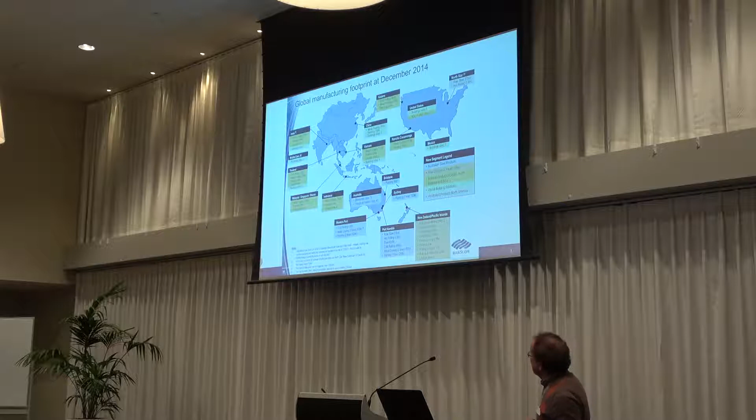My name is Habib Zughbi. I am from a group called Coke and Iron Making Technology in Bluescope. We're based in Port Kembla, and the group is about 10 to 15 people. We've got a long history of mathematical modeling, CFD, DEM, flow sheeting, other more mechanistic models, mass and energy balances, and so on.

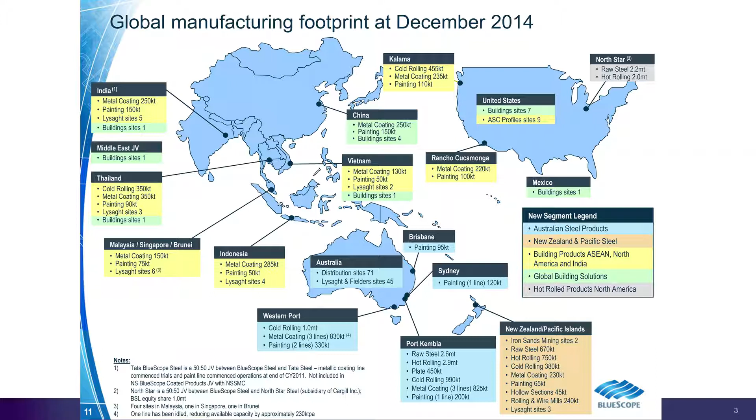Bluescope is basically a global building solutions company. We've got a footprint in about 19 countries. We are based here in Port Kembla, which is an integrated steelworks. We've got, at the moment, one blast furnace operating, plus a coke oven, sinter plant, blast furnace, BOS basic oxygen steel making, casters, and painting and coating lines. We produced about 3.1 million tons last financial year, probably a little bit more this year. Our products are mainly flat products, fencing and roofing products, and as I said, we've got a footprint in many other countries around the world.

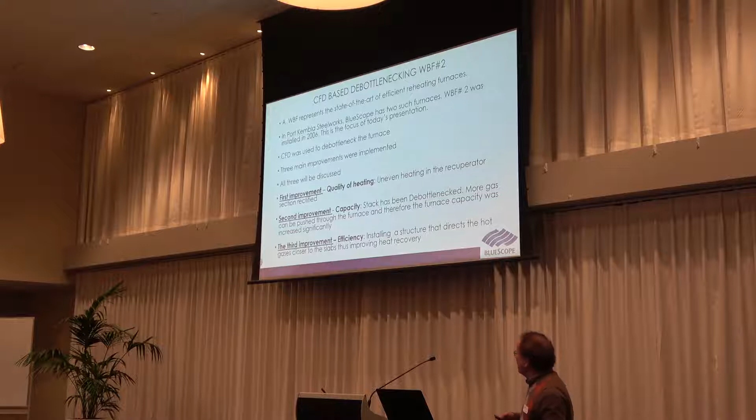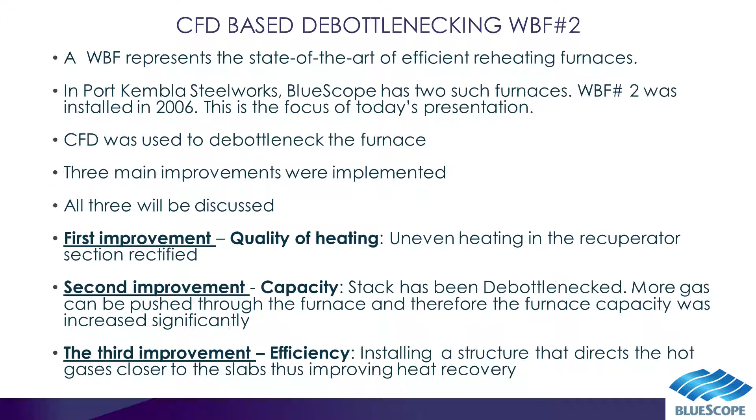The first issue is the quality of heating in the recuperator section—there was uneven heating, and we fixed that. The second, and maybe the major one, was improving the capacity, which was really focused around debottlenecking of the stack. The stack has an induction fan and a venturi, and just by a simple adjustment we were successful in increasing the capacity significantly, to the tune of almost 25 tons an hour. The third improvement was better efficiency of heat recovery. We'll talk very briefly about each of these three.

The walking beam furnace is pretty long, about 50 meters long. The furnace proper is here, where you have two opposite sets of burners from either side, and the slabs travel counter-current to that—gas flows one way and the slabs go the other way. After the furnace proper, these hot gases keep flowing, heating the slabs.

The gases then go through a very convoluted path—they make a 90-degree bend, go up, make another 90-degree bend until they get there, and then drop into the recuperator section. So it's a pretty convoluted, pretty big geometry.

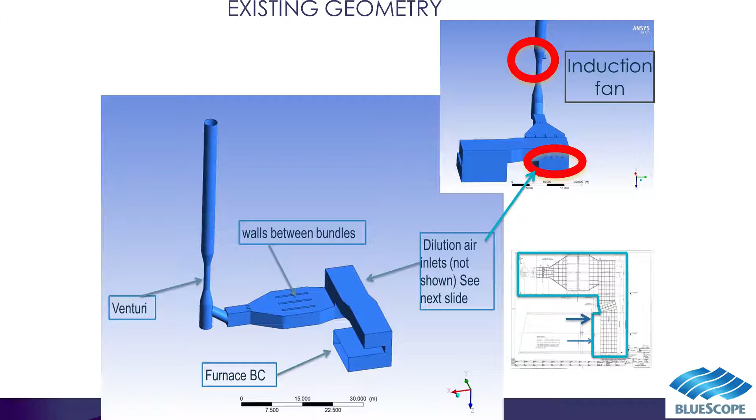The cold air is injected right at this point, as shown here. The hot gases come in to control the temperature, and we inject a fair amount of cold air in there.

In the recuperator section you've got about 12 bundles of vertical tubes that recover some of the waste heat. What was noticed was really uneven heating—the difference was something like 100 to 150 degrees across the width of the recuperator. The hot gases from the furnace were well mixed; the issue was how well the cold air was mixing with the hot gases.

So we started looking at where best to inject the gases. We moved the injection point from here to here. You can't really see it from this view, but it's a very swirly type of flow. By injecting the air right there before it drops into the recuperator, it did not have the time or the space to mix.

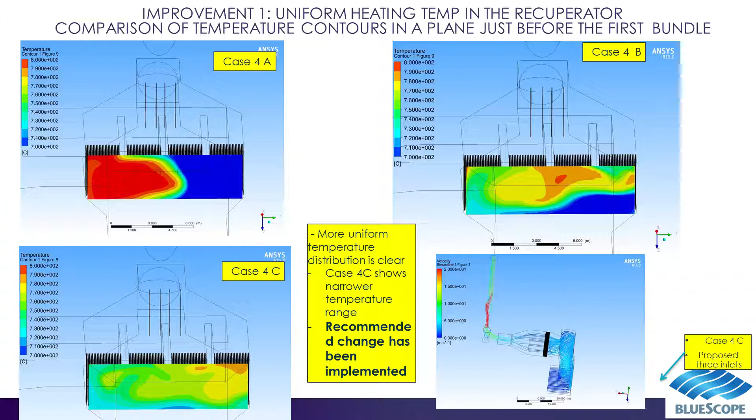So it was coming in and then staying on one side, resulting in this temperature profile. Just by moving them to here, where it's got a lot more time and space to really mix in, we moved from this profile to about this profile, resulting in a much reduced non-uniformity in the heating in the recuperator. The change was implemented, and the results were achieved as shown.

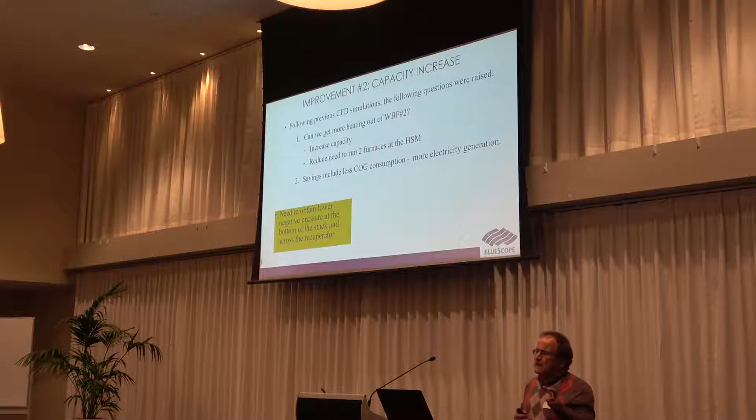The second one is how can we improve the capacity. We have two furnaces, and the gas balance in an integrated steelworks is always a challenge because we've got indigenous fuels - blast furnace gas and coke oven gas used as fuels. If we have good balance, we can save millions of dollars on natural gas purchase. Sometimes we have to run the two furnaces, and that really stuffs up the balance of the gaseous fuels across the plant.

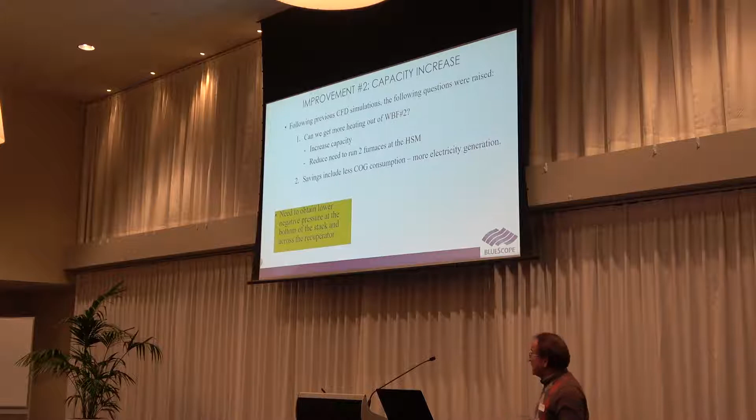So we were trying to improve the capacity so we can run one furnace rather than two. The engineers came to us, as you've seen that venturi in the stack, and asked what can we do to really improve the capacity. Their focus was, can we obtain a more negative pressure at the bottom of the stack so we can push more gas in and heat more slabs.

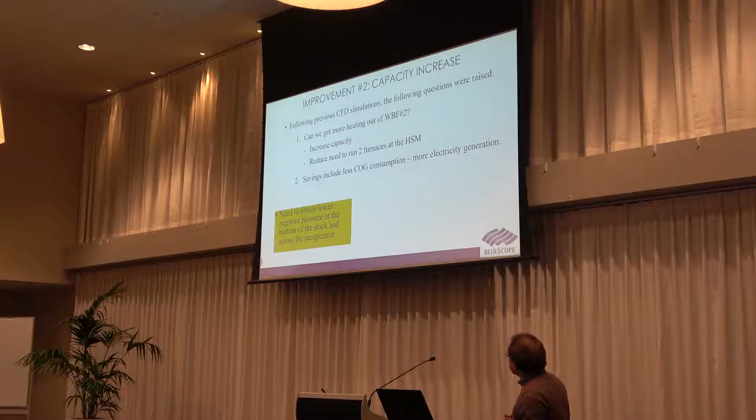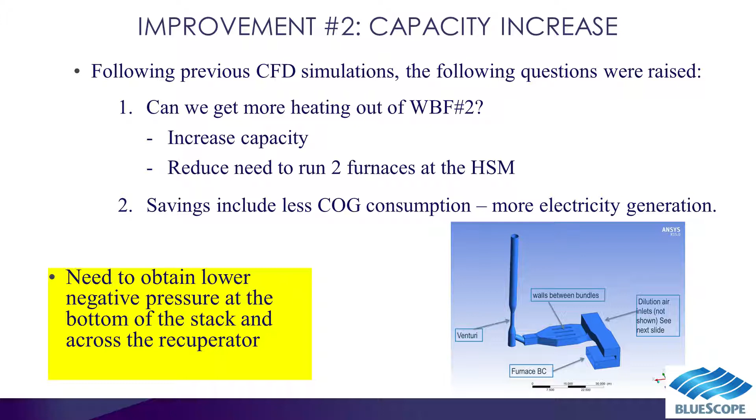So this is the stack, there's the venturi, there's the gas from the recuperator, and the nozzle from the induction fan comes in here, opposite to it. There are maybe 5 factors that control the performance of the venturi: the throat, the straight section between the converging and diverging section, its length and diameter, the gas flow rate, and the position of the nozzle itself.

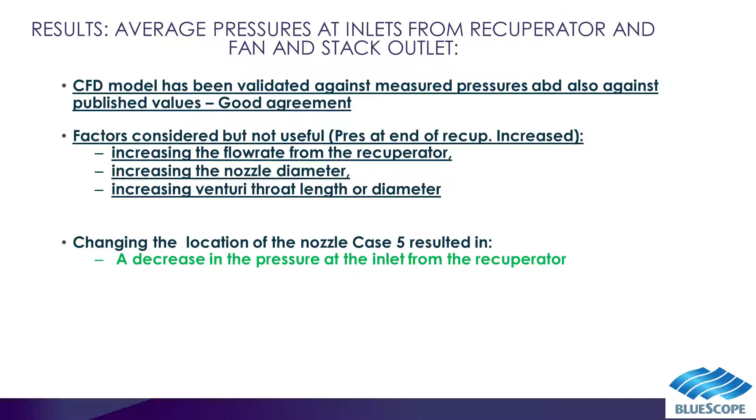So very briefly, we tested all the other 4 and found virtually no improvement in the results. Then we focused on one item - where the inlet from the induction fan hits the venturi. And that's where we really achieved the results. That's what I mean here.

Right, the old one, that's the venturi. That's the converging section, straight section. That's the throat, and that's the diverging section. It was coming right in here at the bottom of the converging section.

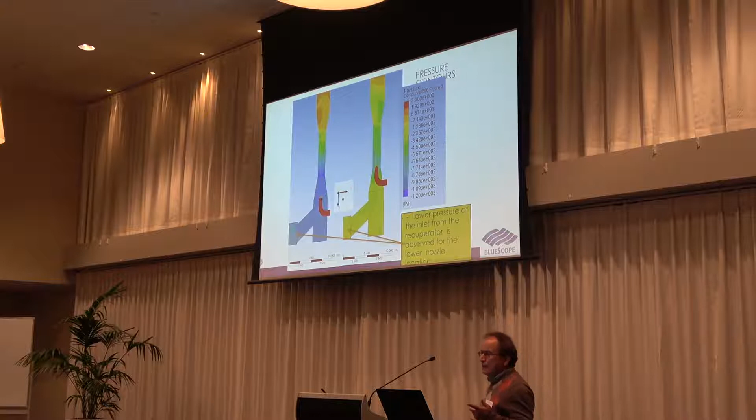So we did some parametric runs, up, down to here, further down, and so on. What we found is just by this simple and cheap change, if we shift it from here to there, then the whole function of the venturi changed significantly. These are the pressure contours and a little bit more theory.

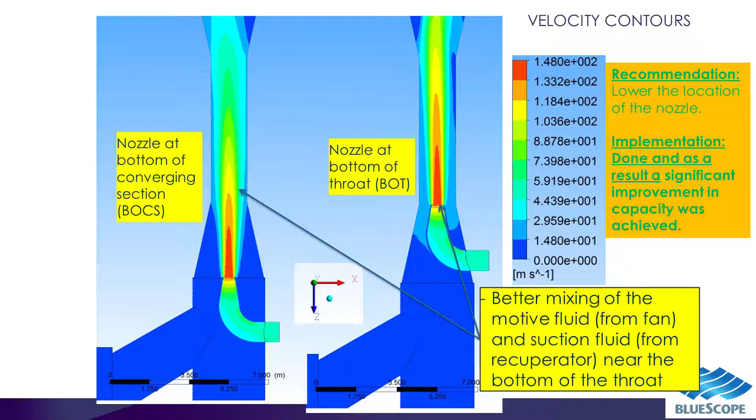There's nothing new about the theory, I must say. There are papers from 1945, well before CFD, talking about venturi functions, and they actually talked about where is it best to really put the motive fluid. So just by looking at that, the theory is that when you hit that straight section, this whole thing should have been really totally well mixed.

As you can see, if you do it in here, this thing keeps on mixing almost to the end of that straight section. By moving it down to here, it almost did what it's really supposed to do, and we got much better mixing.

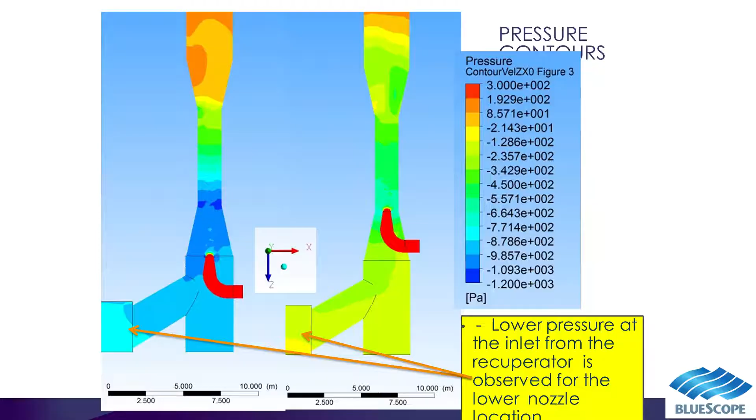And therefore, as you can see with the pressure contours, this is a lot lower pressure than it was. This is where it is here, about there. By moving it down to here, we went further down, about 300 pascals - 300 pascals lower than what it was before.

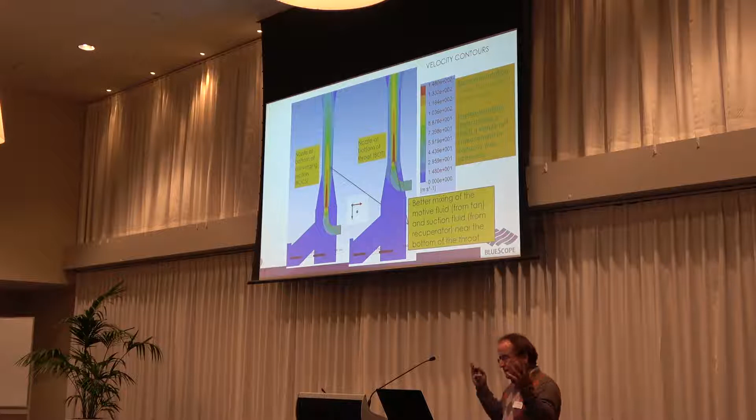So the engineers were convinced, and then they went and did the small change. It's not really a big change, and it was implemented, and indeed the capacity, as I said, has gone up by about 25 tons per hour, with significant savings per ton, adding up to about $1 million per year from that single improvement, without the first one.

One last improvement: after the furnace proper, the hot gases keep flowing and the slabs countercurrently flow. The furnace is about 1.8 meters high, so there were no obstructions for the gas to be redirected to the slabs. The gas was flowing and making some contact with the slabs, but the efficiency of heat recovery was not really as good as it could be.

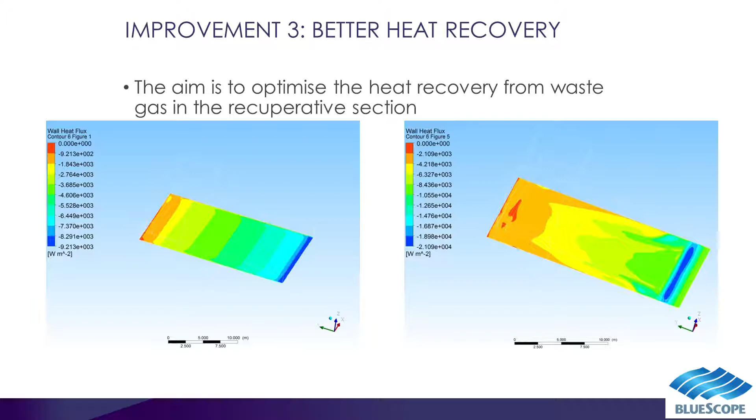We've got a second furnace, actually, that's got something in it. So we did the basic flow and heat transfer runs. We installed - we call it a plate, but it's really a huge hemispherical structure - to force the gas more towards the slabs.

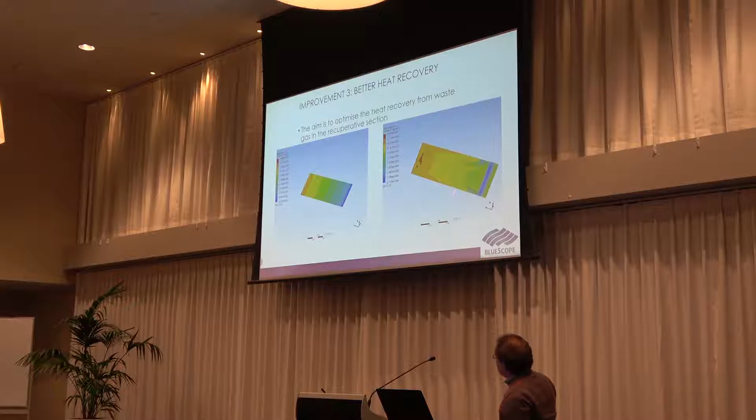And as you can see, we achieved a lot better heat temperature distribution compared to this one. The higher temperatures were spread a lot further away, and the temperature of the exit flue gases was significantly lower than before.

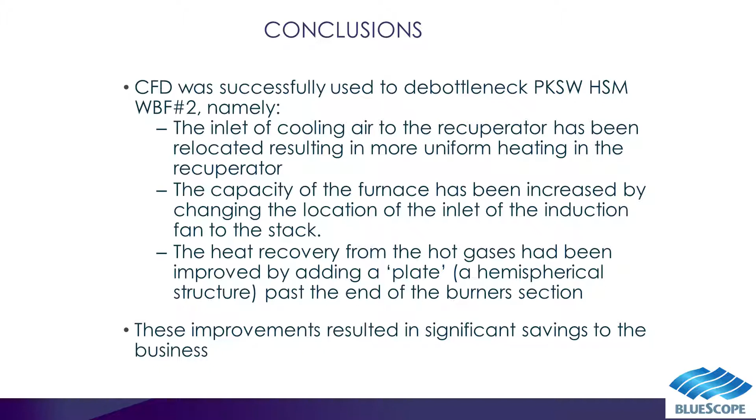So to summarize, we used - and that's not the most complex of our models by any long shot, it's a simple fluid flow and heat transfer model - however, we're lucky to pick on 2 or 3 applications for one particular piece of equipment, where each one was pretty successful, and the result was very, very satisfactory. Thank you.